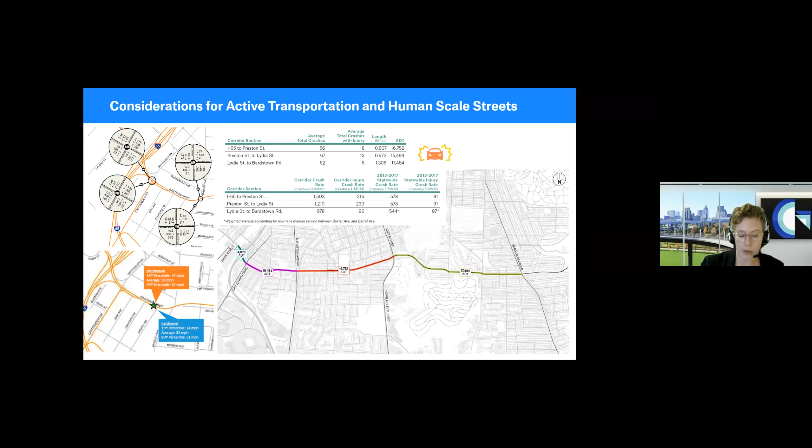What I do is specialize in active transportation planning and design, and it looks a little different than your traditional roadway planning. Here are some of our traditional roadway data sets - speed, turning movement counts. This tells us a lot about cars, but not a lot about people utilizing the corridor. So we have to get into additional considerations when developing human scale streets, or even retrofitting streets to become more human scale and less car centric.

Basically, in each of these categories we're evaluating the comfort, safety, and connectivity of our networks, particularly those that serve our more vulnerable roadway users, making sure we're developing those human scale effects so people will choose active transportation rather than driving. If we don't make it really desirable, a lot of people won't intuitively make that choice.

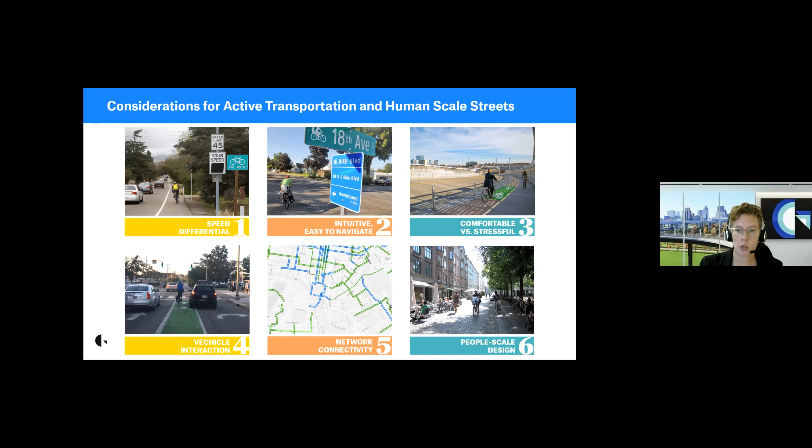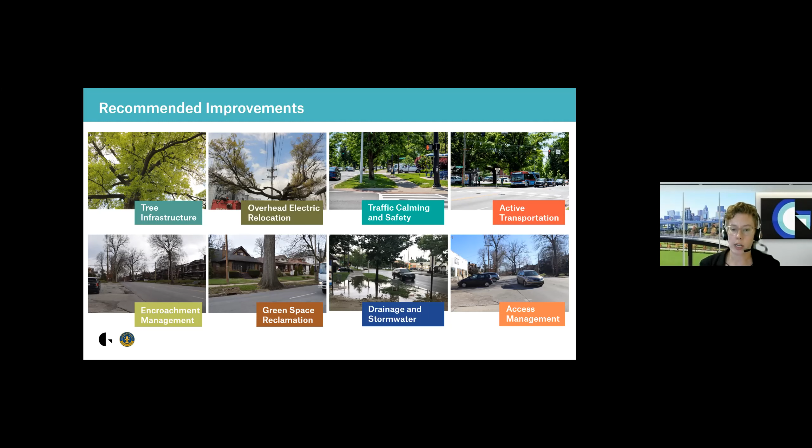I also wanted to touch on Eastern Parkway briefly. All of these considerations about comfort, safety, and connectivity were inherent in the Eastern Parkway Transportation Plan, which we completed earlier this year. I don't have time to go through the entirety of the plan - we could talk for days about Eastern Parkway - but there were a wide range of recommended improvements for transportation, traffic calming, safety, active transportation, access management, but also looking at our green spaces, relocating overhead electric, our tree infrastructure, making sure we're preserving the historic nature of the Parkway corridor and bringing that character back into areas missing some of that tree canopy and character.

If you guys are interested, I will drop this link in the chat. Please, after this presentation, go to louisvilleparkways.org and you'll be able to open and review the entire Eastern Parkway Transportation Plan. It is not a light read, it is quite substantial, but I wanted to pull out a couple highlights real quick.

We did holistically recommend a roadway reconfiguration, taking it from that more dangerous high-speed four-lane configuration to a three-lane configuration, which slows traffic and improves safety for everyone, but also allows us to bring in those light vehicle lanes that Mike King was talking about just before me. We also recommend a fully separated shared use path for those who are not comfortable biking in those light vehicle lanes, giving them an opportunity to get out of the road and feel safe and comfortable.

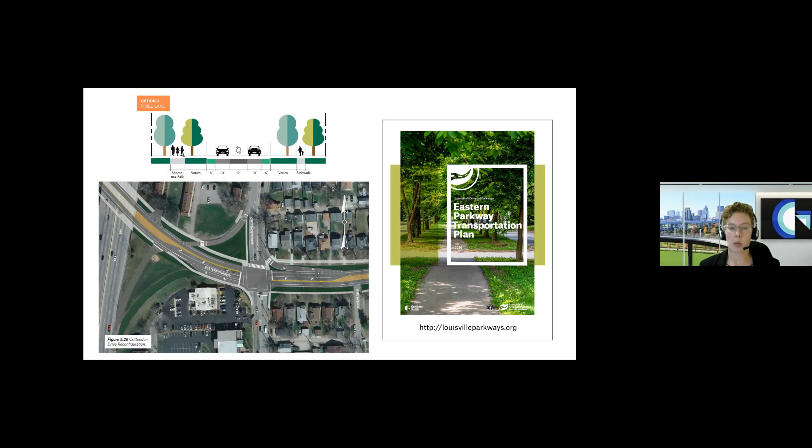We also took a really deep dive into intersections. I pulled this one out because it ties into the existing University of Louisville section - what it might look like if we reimagined where the I-65 ramp comes into Eastern Parkway, removing some of the conflicts we see at the intersection today where it dumps into that right turn lane, improving operations and safety for everyone.

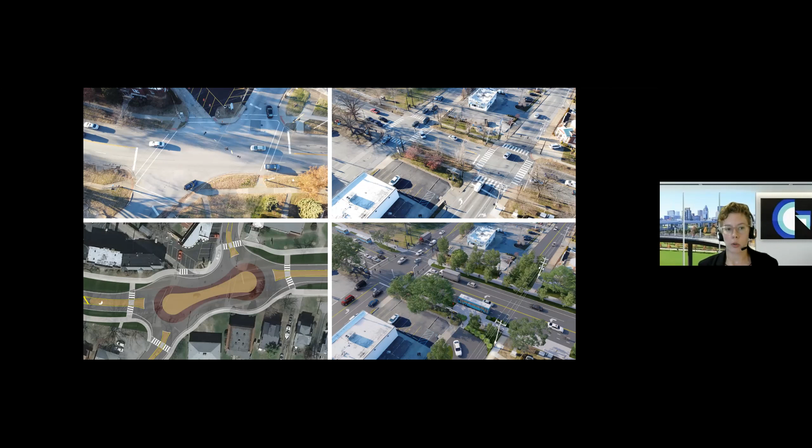We also looked at things like two-way street conversions, looking at Preston and Shelby Street, as well as a lot of innovative intersection designs. All of these were really focused on slowing traffic, improving safety, and making it easy for somebody to make that decision to not get in a car and drive, but to use another form of transportation.

Throughout the whole corridor, we did a deep dive into active transportation holistically - looking at transit stops and amenities, transit stop spacing, sidewalk condition, connectivity and accessibility. Is a sidewalk there? Does it get you to the transit stop? Does it get you all the way to the corner? Is it blocked with utilities? As well as looking at connections for lighting, safety, and comfort for people to be able to walk, bike, and scooter throughout the corridor.

So that was Eastern Parkway by the fire hose method. I'm looking forward to maybe answering some more targeted questions as we continue, and I'll go ahead and hand it over to, I believe, Carrie.

Thank you. Really interesting.

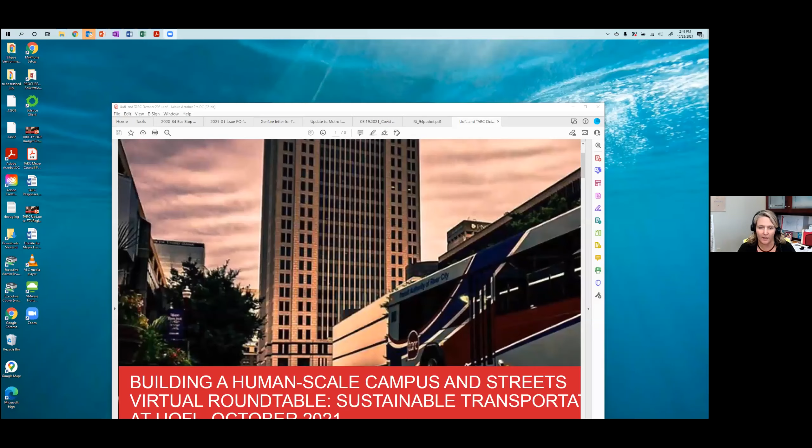Interesting information, and I'm glad to hear that so much work has been done, especially on TARC routes. Is everybody seeing the slides at the TARC bus? Okay, good.

So I will go again kind of quickly through the slides. TARC's mission statement: deliver transportation services that enhance the greater Louisville community.

We are in a very interesting time for TARC and for public transportation generally. COVID has been a tremendous impact. In some ways I don't like to say anything has been positive about COVID, but I think having a deeper understanding of the critical nature of what we did—we were, as an industry, deemed essential, kept operating throughout the pandemic—and also acknowledging the folks that continued to ride were folks who were needed in our community, whether that was nurses or grocery store clerks, people who also had to go to work or continue to travel. So it's been a challenging time, but I've felt even more deeply committed to what I do and being engaged in this space with public transportation.

TARC services: we have 25 local and express routes. We have changed some of our commuter express routes over the past couple of years in recognition of how people aren't traveling in our community as they used to. We have some circulator routes—one is Route 94, which folks at UofL's campus are probably very familiar with. And then we provide Americans with Disabilities Act paratransit service.

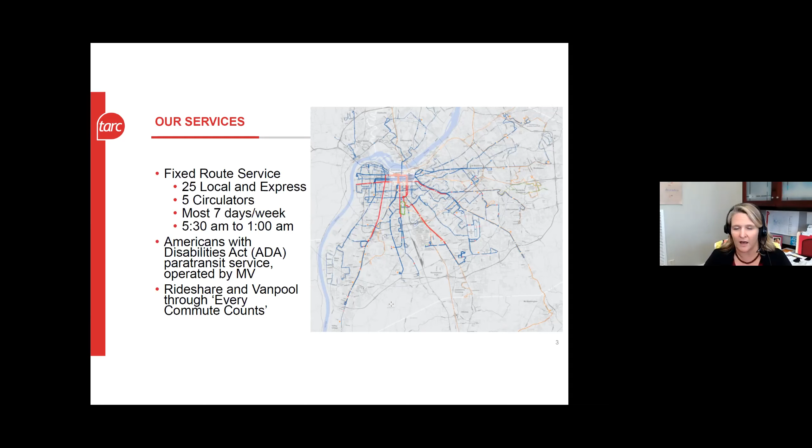That operates within three quarters of a mile of our fixed routes and is a curb-to-curb, door-to-door service for people who, by nature of their disability, can't ride the fixed route. We also have a longstanding partnership with Kentuckiana Regional Planning and Development Agency for a van pool program called Every Commute Counts.

Our ridership overall is just about 50% of what it was pre-COVID. We've seen, at least in the past few months, a slight uptick from our lowest point, where a lot of people were working from home, a lot of virtual things happening, and people not really traveling around. So we anticipate we'll continue to see increased ridership as more people go back to work, as more businesses fully open, and as more people feel comfortable traveling in the community.

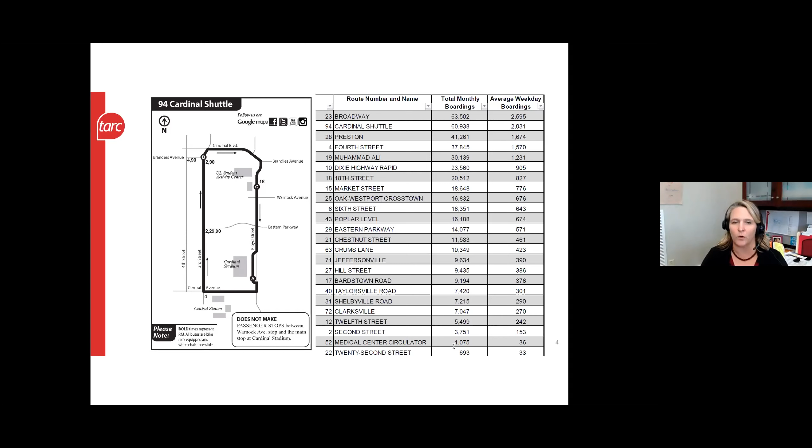But there's a bit of a caveat, because even anecdotally you hear things like, well, my husband doesn't know if he'll go back to work, or people probably aren't going to commute the way they did, especially for those work trips that a lot of TARC service was built around—into downtown and out of downtown in the peak hour commute pattern. So as an industry there's a lot of rethinking and wanting to explore different options and ways to deliver service differently. It's certainly an exciting time to be in this space because there's a lot of opportunity for change and some opportunity for innovation.

I'll just make a note: we have close to 4,000 bus stops, about 300 shelters throughout our region, which includes Jefferson County and some limited service in southern Indiana across the river, and almost 500 benches.

We have new digital displays that are part of our Dixie Rapid Bus, and we have operated electric buses—zero emission electric buses—in our fleet. Some of the circulator routes were put on temporary suspension due to changes with COVID and impacts downtown. But I can talk more about electric buses and zero emissions in the Q&A.

We have a ton of things happening in our organization right now. I cannot mention enough—this may not exactly be the place for this, but we are hiring. We are feeling the labor shortage in our country as acutely as anybody else.

One of the really big challenges is that we continue to get requests for service to get other workers to work, and we're having to tell folks we can't make that service happen because we don't have enough staff. We don't have the drivers to do the work to meet the schedules that we say. So if you know anybody who is even marginally interested in public transportation as a career, or as a bus driver, please have them take a look at TARC and our benefits and our hiring. I just can't emphasize that enough.

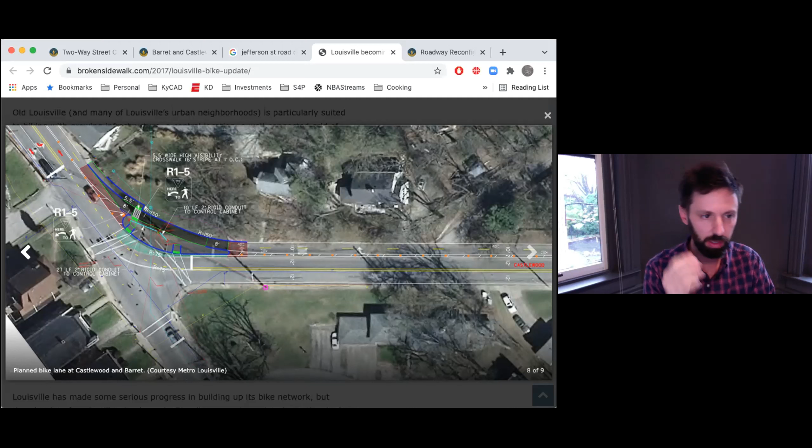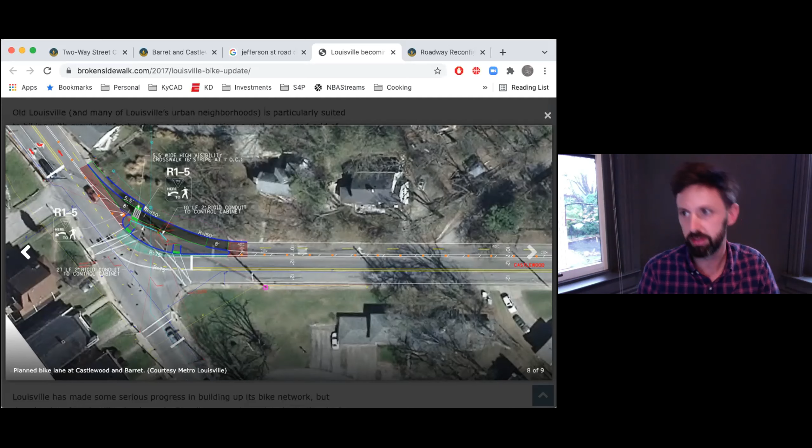We took it essentially from Tyler Park on one end to Rufer, the name of the street, on the other end, and we created this protected bike lane. There was definitely an advocacy piece to it, there was an engineering piece, and obviously there was a political piece.

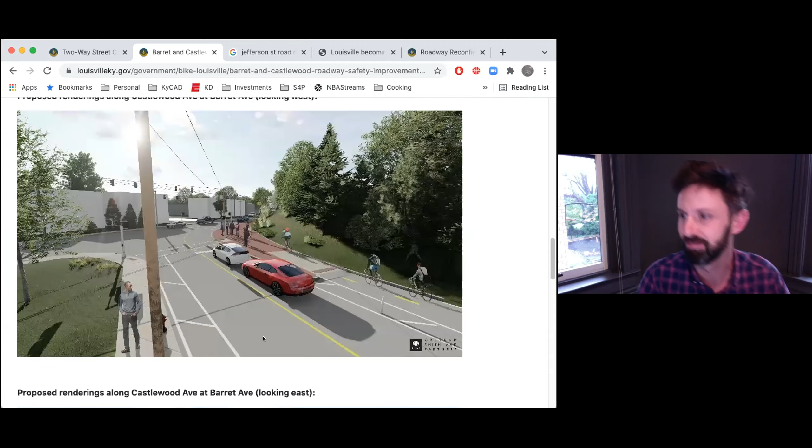So here's the project outlined on the Metro website, where they describe what it is, and here are some renderings. Again, Katie probably was very involved in creating these.

To me, this is a route I bike home every day on. I live in Douglas Loop, I work in Old Louisville, and it's great—there's such a sense of pride I feel from biking home and seeing people walking their dogs and pushing strollers on this. It's not just a bike lane, it truly is a multimodal lane.

I think there was initially a discussion of it being a bike lane, and I've just been so happy to see it's being used by everyone—people walking to and from a park on a very safe, wide sidewalk, multi-use path, whatever you want to call it.

I think one thing our organization does—I like to think this is true—is raise the floor on the conversation. I remember when this project happened, there was mass confusion of like, what is this? There was an article on Insider Louisville that measured the sidewalk in terms of buckets of KFC chicken, like how many Abraham Lincolns could you fit across it. In my mind it was like, let's raise the bar here a little bit, people—this is not an insane idea. The expectation that this could be normalized is really important.

I do think we've seen that to some degree, in that we've been talking about road diet projects in this call. I remember early on, like 2013, 2014, every time there was a road diet it was kind of a drag-out fight. It's still a little bit—there is pushback. There's recently a road diet on Lexington Road, over in St. Matthews.

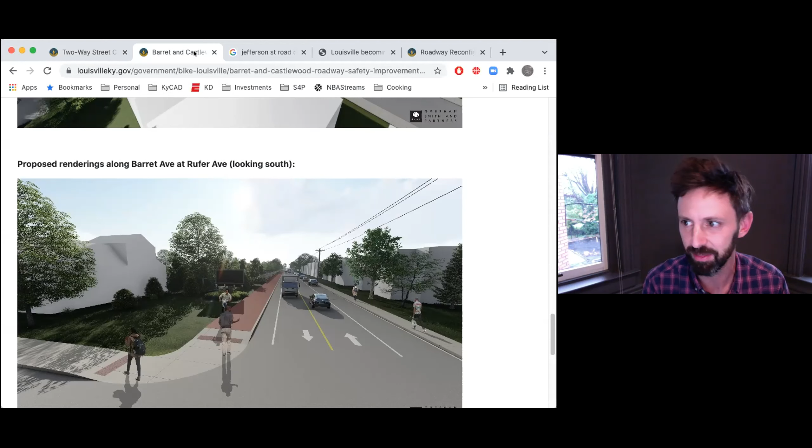Thank you all so much for those presentations. It's always great to have panelists that have clearly worked together beforehand and have some synergy on projects that they've collaborated on. So that's wonderful. We've got some questions from the audience, and I just want to encourage folks to continue to submit those through the Q&A function. I just wanted to ask a question to the panelists, and then we'll move to some of those questions from the audience.

A lot of you kind of alluded to some of these things, but just thinking big picture, and being visionary about our potential for our transportation system, and reshaping it in a way that is oriented more towards pedestrians, cyclists, and transit users — what do you think, in our current political, economic, social context, are the greatest opportunities for actually making some of these changes? If each of you could give us your thoughts on what those opportunities might be here in Louisville right now, and talk a little bit about some of the key barriers you also see in your work for making those kinds of changes. I'll open the floor up to anybody who'd like to start.